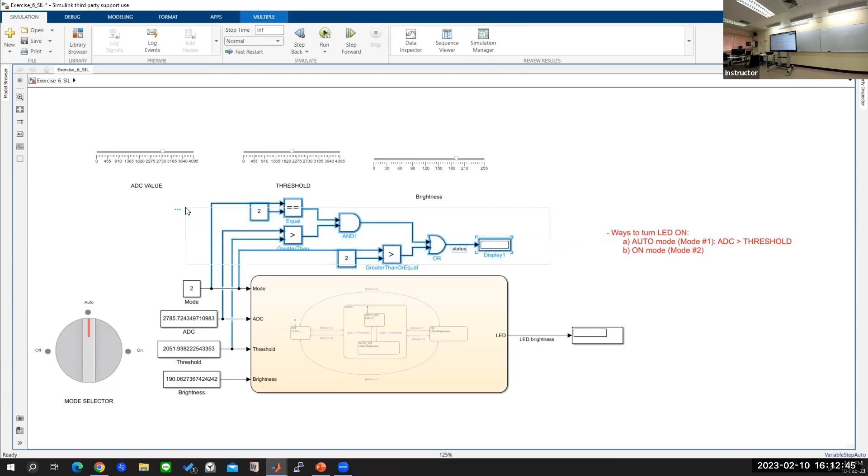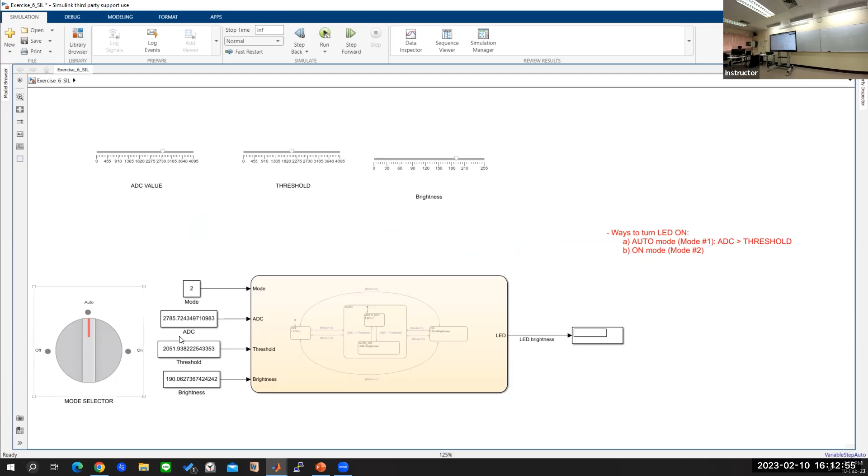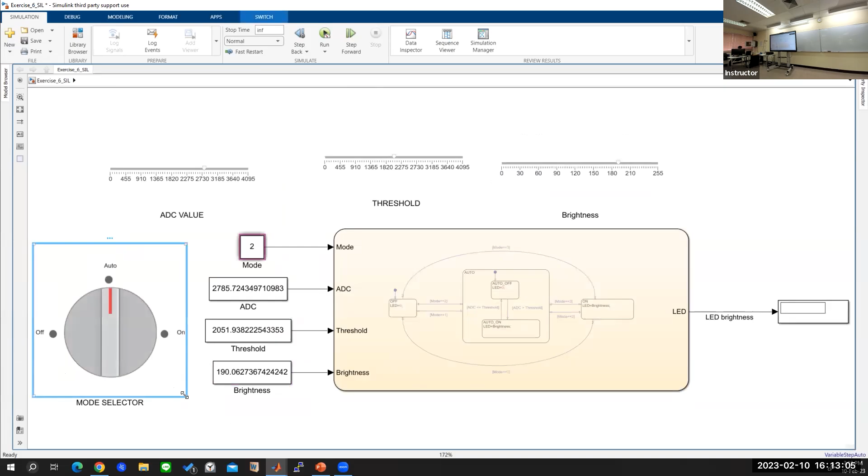You can remove this entire small algorithm that we wrote. We don't need this anymore because this was related to turning the lamp on or off, right? Okay. And this I'm just going to remove. This mode selector can still be here, no problem. I'm just going to make it smaller. The threshold, you can bring it here. The brightness, you can bring it here. Okay.

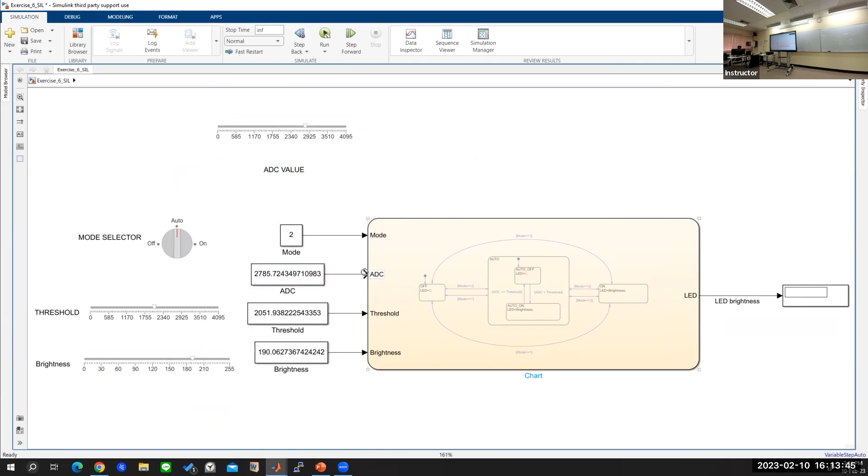Next to, and you'll see why in a second. Okay. And lastly, also switch ADC and mode. By switch, I just mean go to this and you'll see this kind of arrow, okay? Just drag and switch. It will help you keep things more organized. Once again, go on the arrow and switch.

Switch, and then just make this ADC on top. Okay. Is everyone here? Is everyone following? Please raise your hand if not.

So now getting into the hardware part. Whatever we've designed, we want to deploy this to the ESP32s, to the hardware that you have in front of you, right? So to convert this entire model into something that can be deployed and used to automatically generate C code, we have to do a few things. You have to use the Waijung block set.

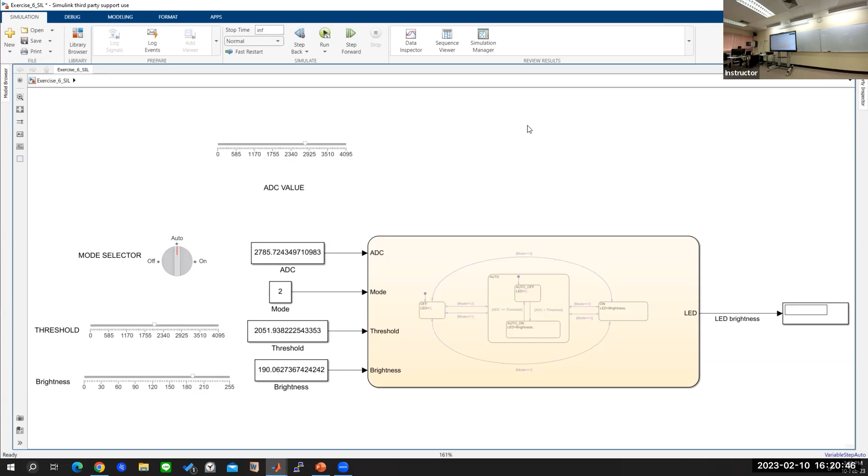Okay, so I'm gonna show you the first step. The first step is importing the Waijung 2 target setup block. Without this block, you cannot use any other Waijung block. This has to be there. So please search for Waijung 2 target setup block, and you might see many options. Please select the one that says ESP32 target. You might also see the Zynq 7000 target. Do not select that one. Select the ESP32 target one.

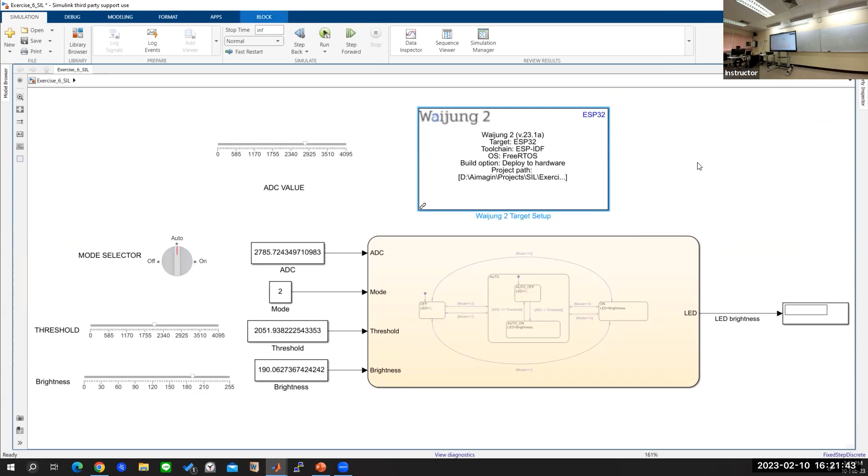The block should look like this. For you guys, it will say 22.12 over there. Okay. Does everyone have this block? Okay. Now, please double click on this block, and we're going to make some changes, okay? In the build options, please select external mode simulation.

As soon as you select external mode simulation, you will see that instead of 3 tabs, now you have 4 tabs. Okay? So can someone remind me, because I mentioned this in the presentation, what is external mode? What does external mode do? From where are we sending the data to where? Simulink to hardware. So whatever we do over here, in real time, you will see the changes on your hardware. If I change the slider, in real time, you will see the changes on your hardware. That's what external mode does. It creates a real-time communication channel between MATLAB Simulink and the ESP32. Okay?

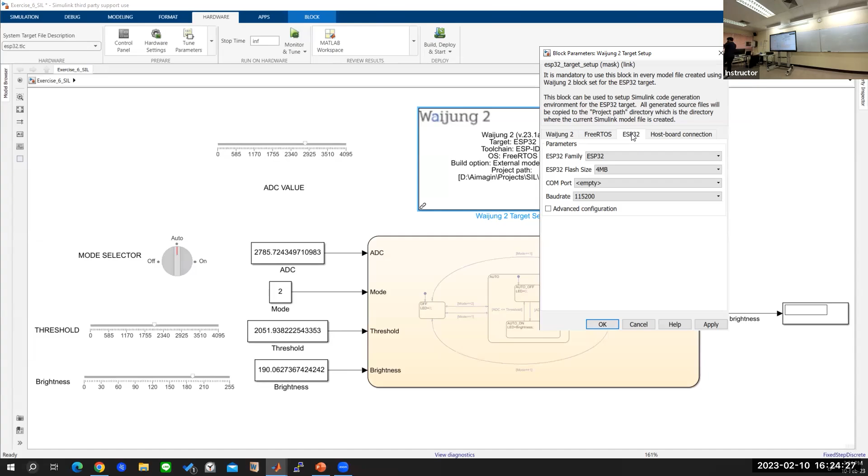So we select external mode simulation. There's nothing you need to change in this tab. You can just go to the ESP32 tab. For all of you guys, please plug the USB cable to your ESP32. As soon as you do that, this one should not be empty. It should say some COM port, COM3, COM6, whatever. Everyone will have a different COM port. For mine it says empty because I haven't connected it yet. So after connecting it, when you open it back again, you will see that the COM port is not empty anymore. It's COM3. And because we all have the identical ESP32s, this stays the same.

For the future, I have to let you know, you can see this drop-down menu, right? This block set supports these 4 microcontrollers of the ESP32 family. All of you today have ESP32. You don't have S2, S3, or C3, okay? But when you're using S2, S3, or C3, you have to go and select this. This is why, without this target setup block, nothing else can work, because you have to select which microcontroller you're using. And you have to select the flash size and the COM port correctly. You have to get the flash size from the data sheet of the microcontroller, okay? But for today's purpose, no problem, because all of you have identical ones. So this one is fine.

For baud rate, you can all change it to 115200. I think for you it will be 460800 right now, right? Yes. But you guys already tried deploying. You can leave it, it's fine. You don't need to change it. If you change it, it's fine. Both work, don't worry about it.

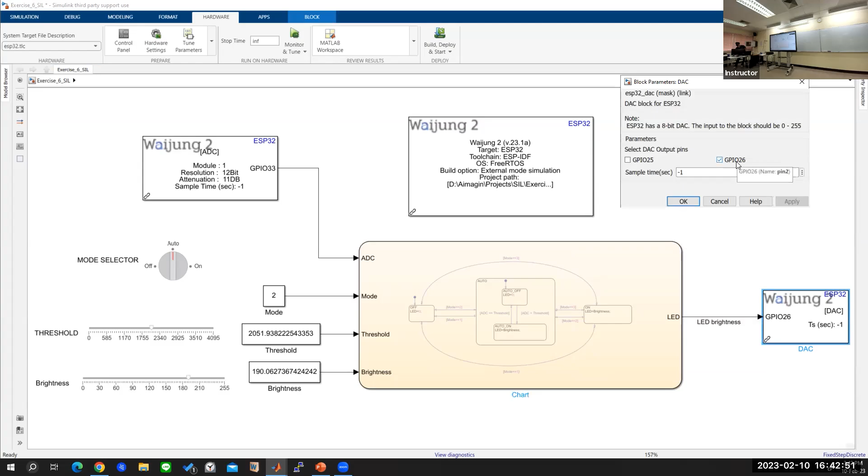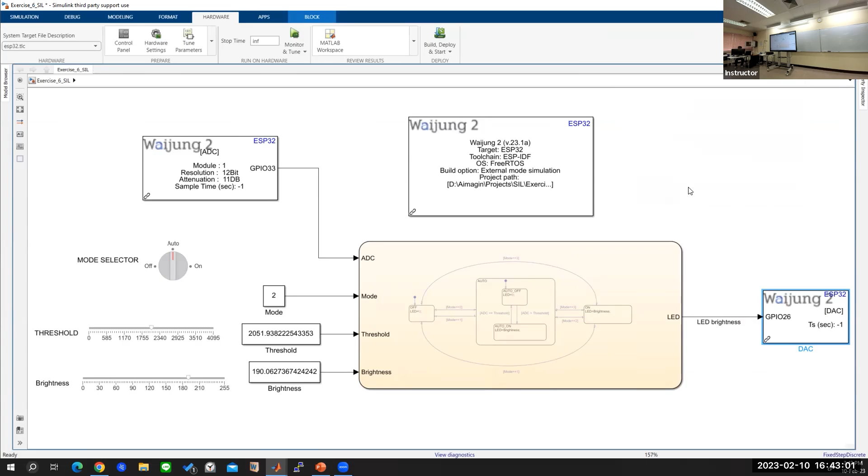Oh, I'm so sorry, guys. I think for all of you, the GPIO should be 26. It's 26, right? It's not 25, right? Okay, because I think that's how Mr. Arunya connected the hardware. GPIO 26 for the LED, right? Sure. Okay.

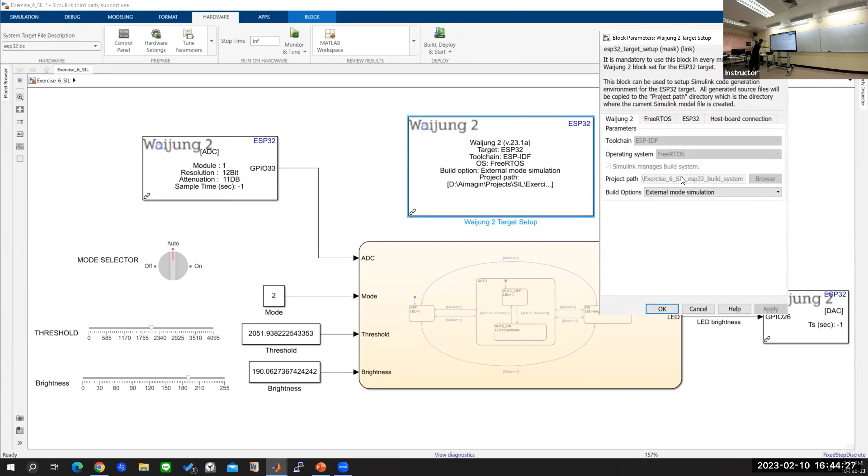So for anyone that's created a new file and is still looking at untitled, please save it in that same folder and navigate to that folder from the MATLAB homepage. And the last thing, before we deploy, I need to tell you this. Because external mode, we are using it via Wi-Fi. Via Wi-Fi is where that communication channel is created between the hardware and MATLAB, right?

When you deploy your ESP32 as an access point, this will be your SSID and password. And I think because all of you did not change it, it's still default. You can remember this. This will be the thing that will pop up in your Wi-Fi adapter when you open it up. And the password is just password. So you can remember this right now.

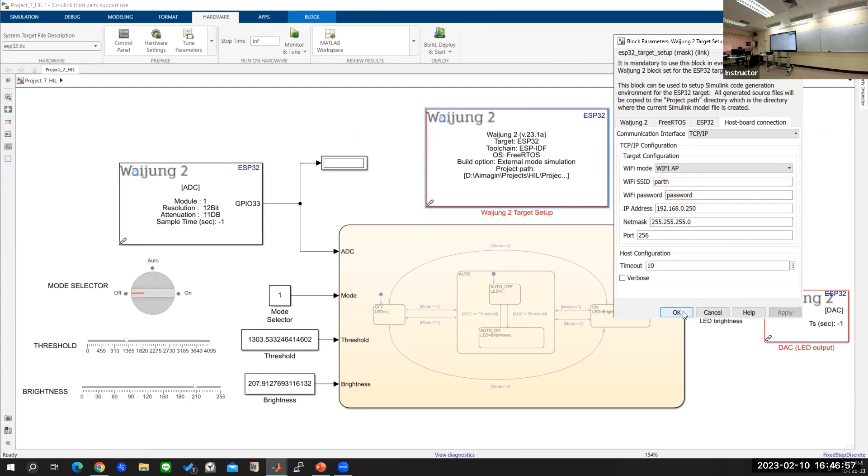Okay, now the final step, everyone should have a hardware tab. Is that correct? Does someone not have a hardware tab over here? Anyone? Does everyone have a hardware tab? Okay, for the rest of you, please go to the Monitor and Tune dropdown under the hardware tab, and you will see two options. Please click Build for Monitoring.

So now you will see that it's compiling. That is the automatic C code generation that's happening.

And for those that don't have a very powerful computer, this is where the build process can be very slow for you. Okay? So the build should look like this, should be building. Does anyone have any errors popping up so far?

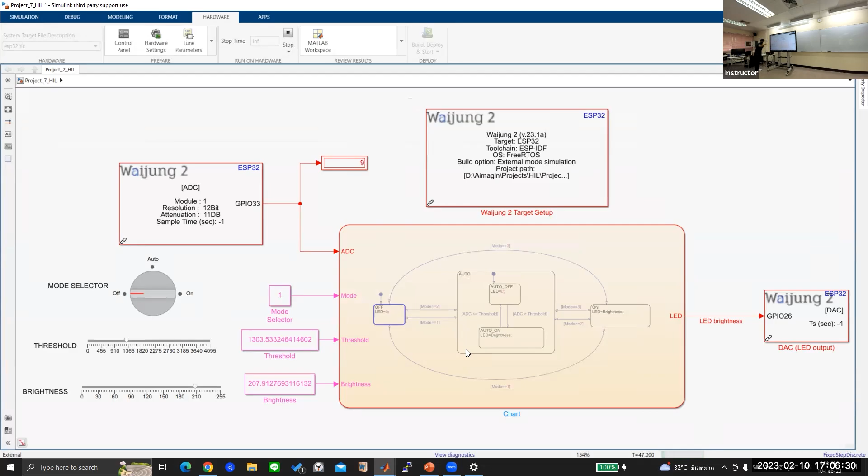Once you click Connect, you should see that there's a blue sign appearing in your Stateflow chart. Once it has successfully connected, then you can start playing over here, and you will see the effect on your hardware. How many people successful? Please raise your hands high. Successful, completely working, everything's fine.